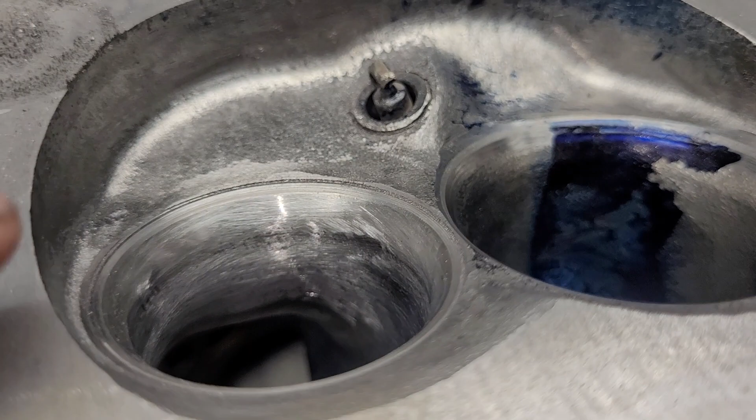You can see we've gotten more around this part of the chamber, right? Because what happens is you put a bigger valve in, this side gets tighter — so it's more and more shrouded. That's going to change the velocity through there.

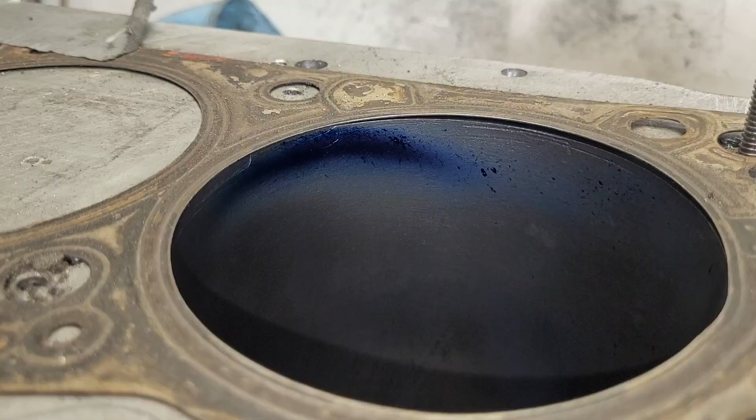And you've got some speckling around the chamber — not great, but not bad. And our bore is a little sparse, but that's okay, it's not done. This really isn't any different than you've seen last time, except it has a bigger valve on it, which did change the angle of our liquid flow a little bit.

So far, the feeling I get on these Chinese Magnums is basically the same feeling I had doing the Chinese Vortec Magnums. I did the New Zealand Vortec before, and it cleaned up really easily, making 275 on the intake and 200 on the exhaust on the first cut — no measuring, no nothing.

I did that for Marvin a while back, and basically I'm seeing the same thing with the New Zealand Magnum versus this Chinese Magnum. This Chinese Magnum takes a lot more work, a lot more grinding, and it's still down 18 CFM.

I do, yeah, we have tight throat ratios, but when I open the throat ratios, I don't think it's going to make that big a difference. We'll probably peak out a touch better. The short side is definitely going to need some work because I picked up 7 CFM by putting a flow ball right on that vane on that roof. So I still have to decide whether I'm taking that vane out. I'd like to see what I can get with it in first. But yeah, the short side is going to need the same kind of work that I did to the regular Magnums.

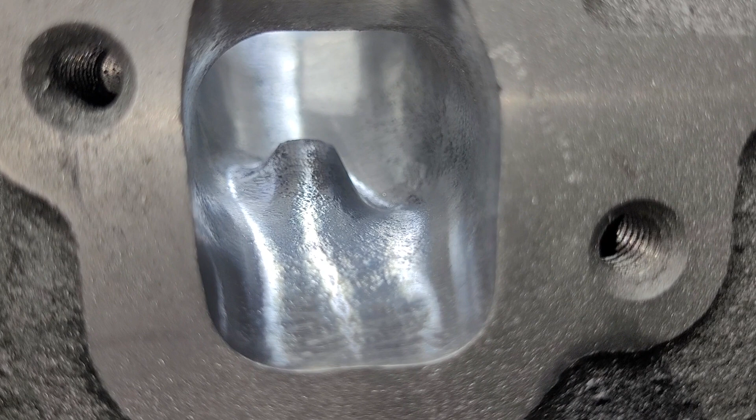The exhaust is exactly the same, but it's flowed with a different valve. So we'll see if that makes any difference whatsoever.

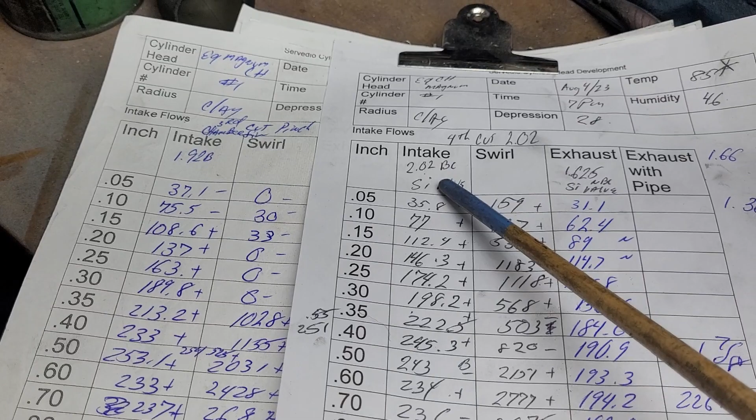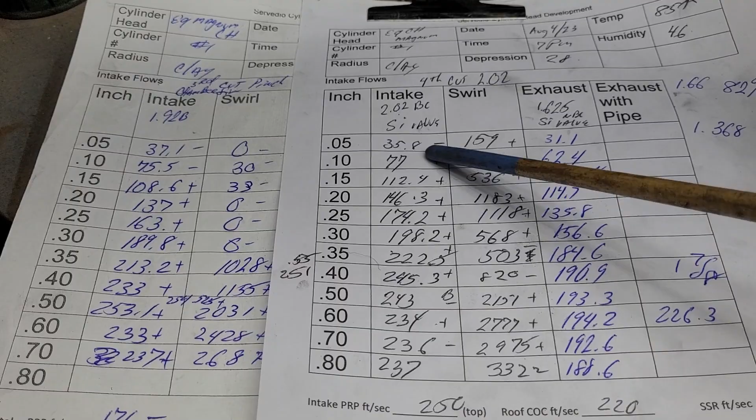Okay guys, third cut. I did some work to it. Still 192. Now what we did is we changed to the bigger valve, and let's see what happens. Basically the same thing that happens usually when I put a bigger valve in, right? We gain more meat—higher flow in the meat of the curve—but it doesn't necessarily top out any better, which is exactly what we got this time, right? We got a minus, we got a plus, plus, plus, plus, plus.

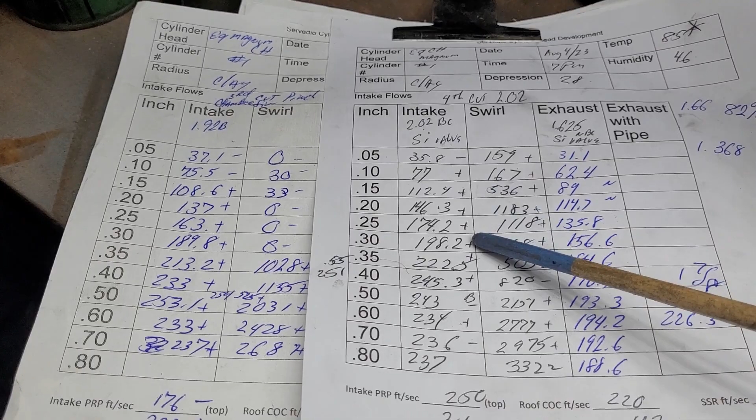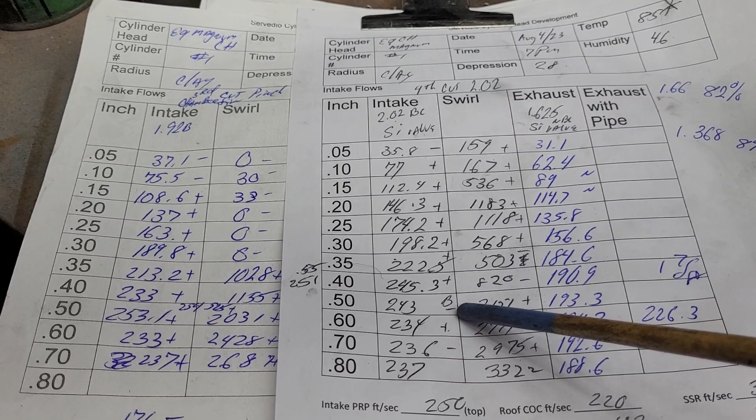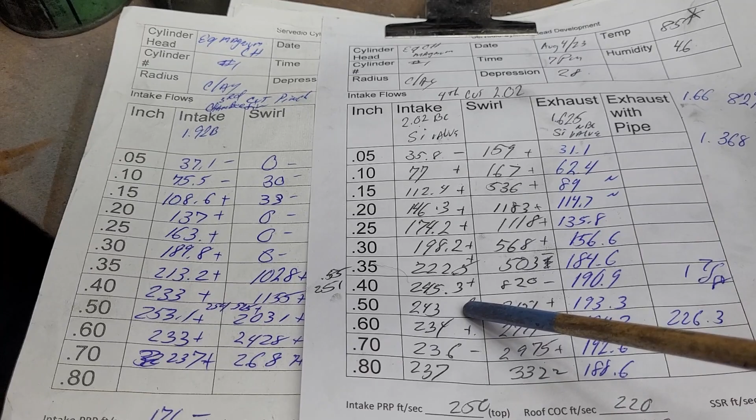And at 500, we already see a B. That's buffering. The short side is attached, and then it's separating, and it's not attached, and it goes back and forth, and your manometer will bounce all over the place, so it's difficult to even get an accurate reading at that point. But in reality, it's already lost it, so it needs work to the short side at that point. That's where I put the flow ball on. You cause turbulence on the short side, helps it to reattach, you get it, and it increases in CFM. You know right then and there what's going on and what you need to do. Okay?

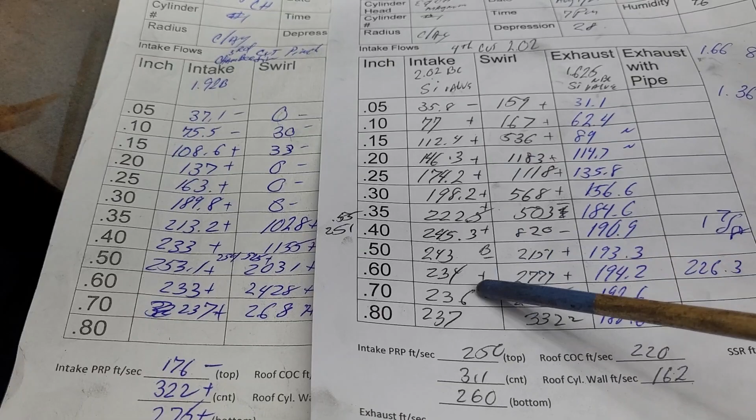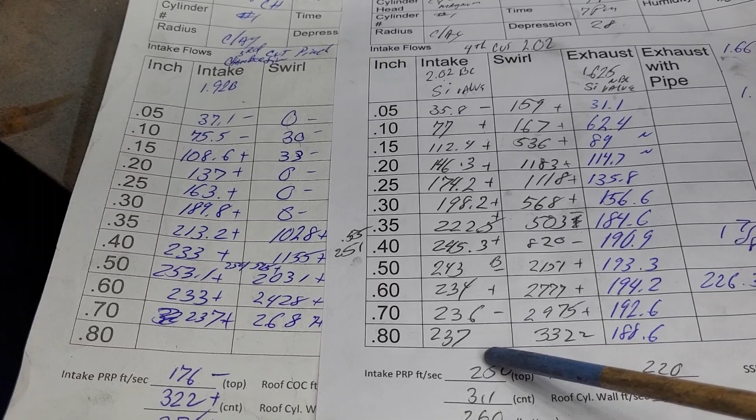And with the different valve, I was able to get up to 800 lift. Okay, I don't have anything to say about that.

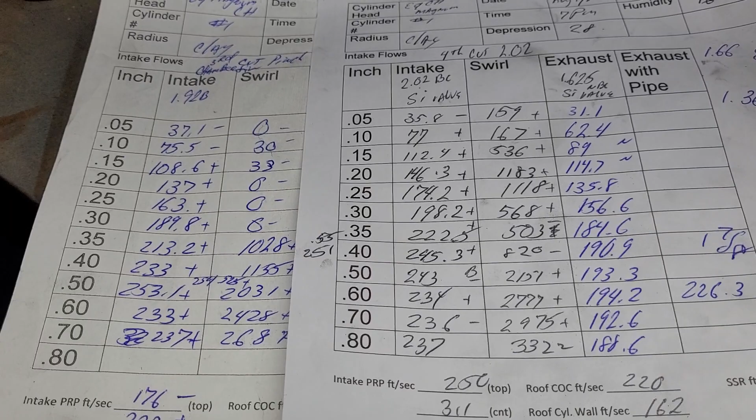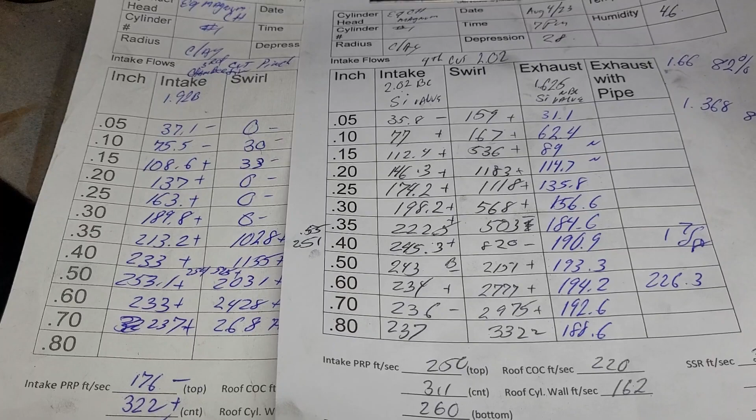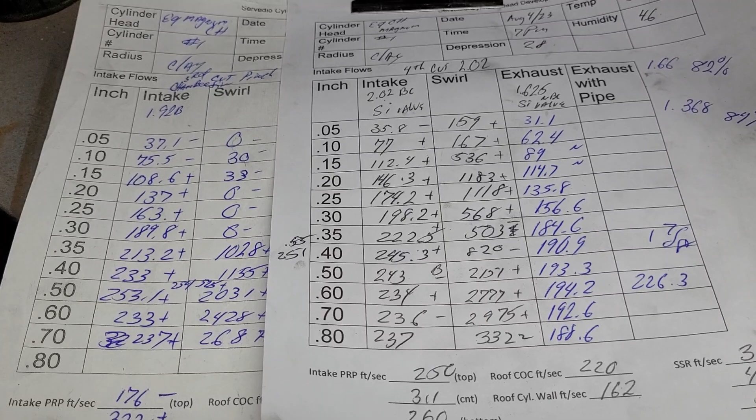Let's go see our swirl. Our swirl actually went up almost all of the curve. I got 2 minuses, okay? Which is counterintuitive as far as I'm thinking. Right? Because the bigger valve is shrouded more, it would be harder to get air on the shrouded part of the chamber, which is really going to increase your swirl numbers. So that I wouldn't have expected that kind of curve. Okay?

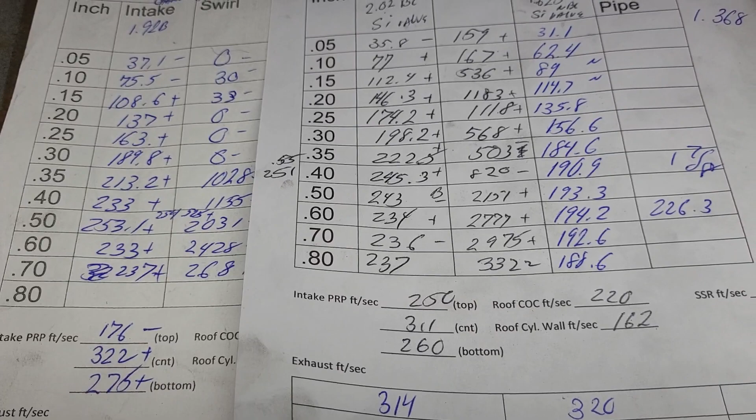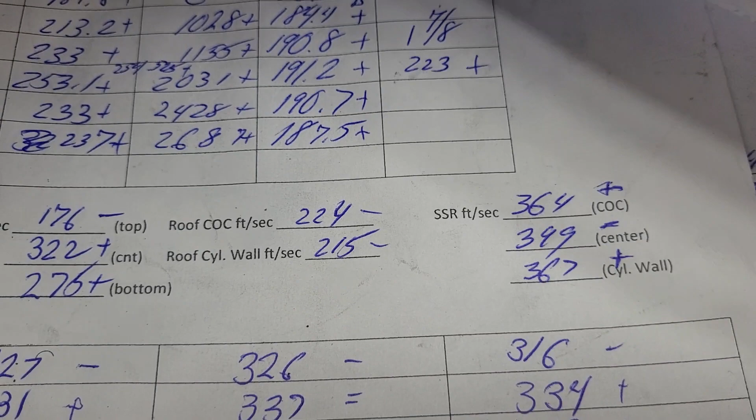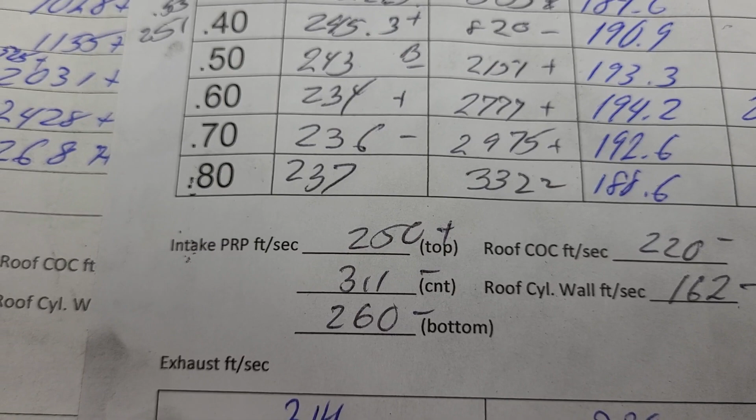Okay, let's do our airspeeds and see, because the bigger valve is going to radically change your airspeeds in the port. So let's take a look at that. Okay, so those are what our airspeeds were, and this is what we've got on your pinch: plus, minus, minus. It is nice and even top to bottom, but as soon as we do some work to the short side radius, that'll radically change, so I wouldn't hold too much validity in that. That's what we had on the roof. The roof was pretty good with the smaller valve, pretty close.

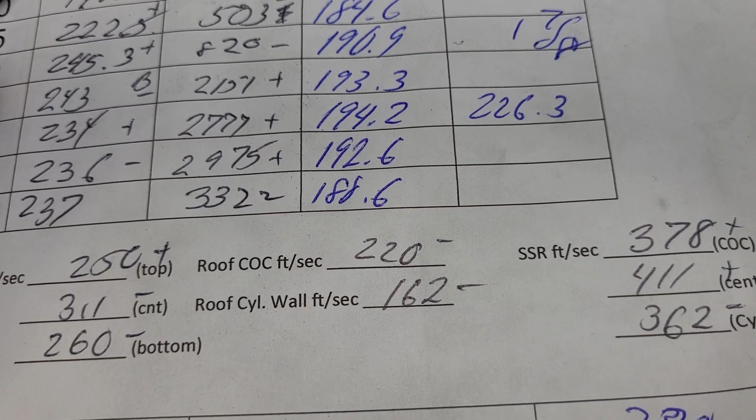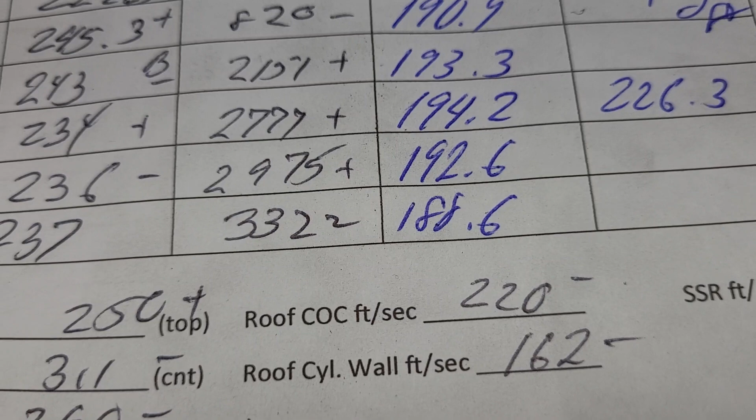Okay, we have a huge discrepancy now. Gee guys, why do you think the airspeeds changed so radically on the roof? I wonder if it has anything to do with the valve being closer to the cylinder wall bore and a little more shrouded. I don't know. You let me know. I think we're on the right path there.

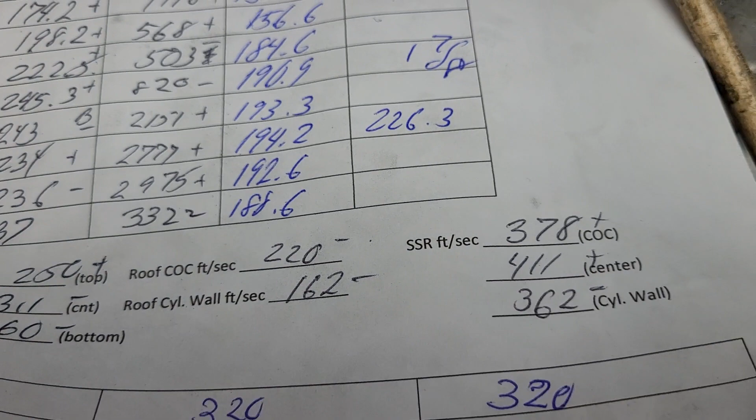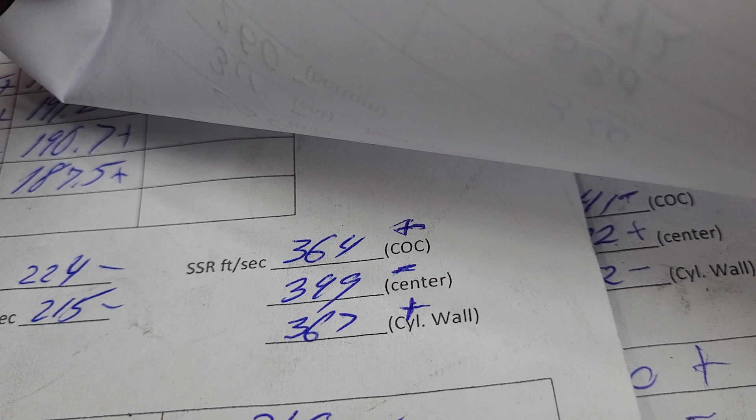And as far as speeds across the short side, that's what we had. This is what we got: 2 pluses and 1 minus. We're not too far from being similar speeds across it, not quite as good as that. That was better, that was better. See, look how close those speeds were. Okay?

And it's interesting where it's fast, right? Okay, let's move on to the exhaust.

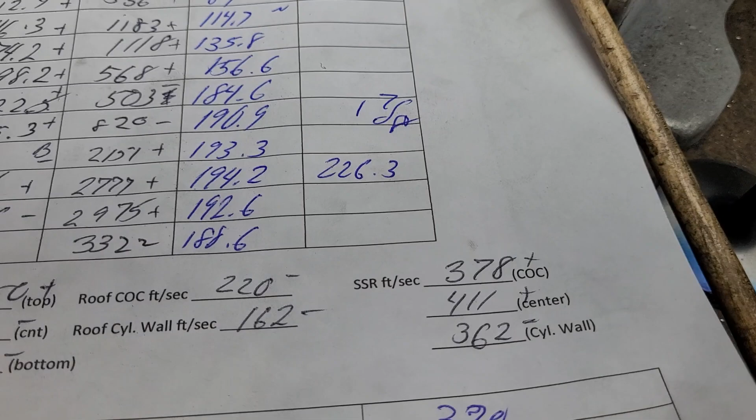As far as the exhaust valve shape, you can notice a couple things. The stock Magnum is tuliped, and the SI is more of a flat design. Instead of the tulip being straight, it's balanced, with more of a curve to it. That's going to make a difference in how it flows, and it's also been necked down a bit. The Magnum has a thicker stem where two pieces have been welded together, but this SI valve is one piece, so it doesn't have that weld.

So you would think the SI would flow circles around the stocker. Let's take a look.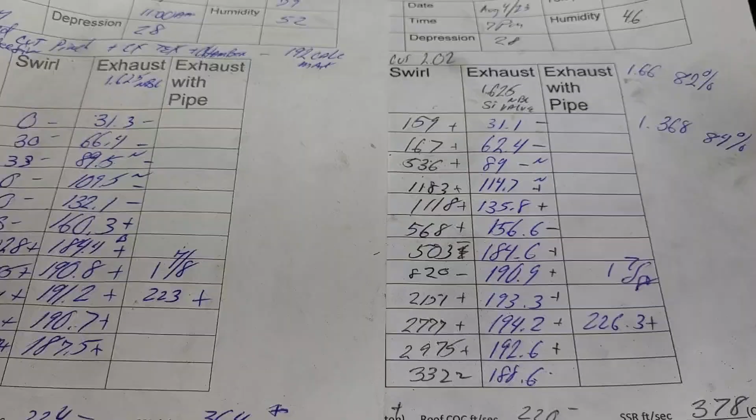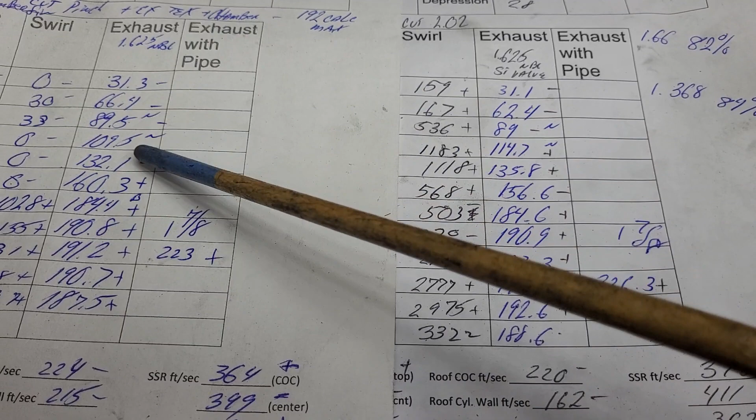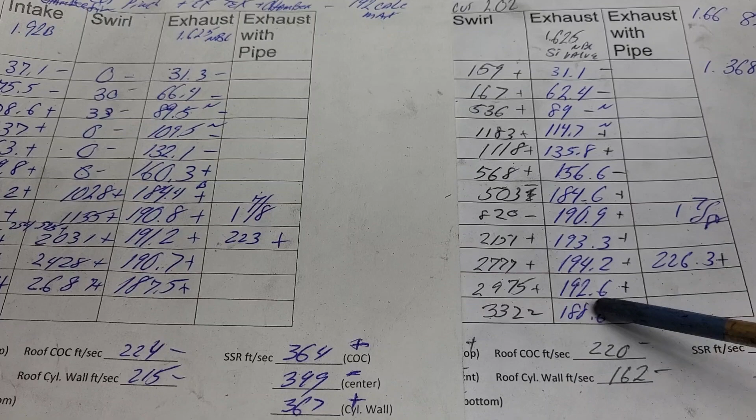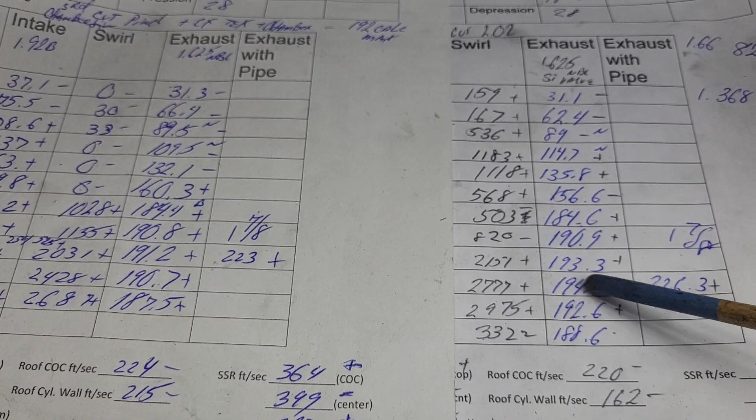Third cut stocker, same port, SI valve. How'd we do? We got a minus, minus, minus - we got noise across the board. Then we started to gain though, here: plus, plus, minus, plus, plus, plus. But the pluses aren't big - it's not that big a difference. I think the biggest difference is we got 114 here, we got 109.5. The losses aren't big either, relatively small, so it didn't change much.

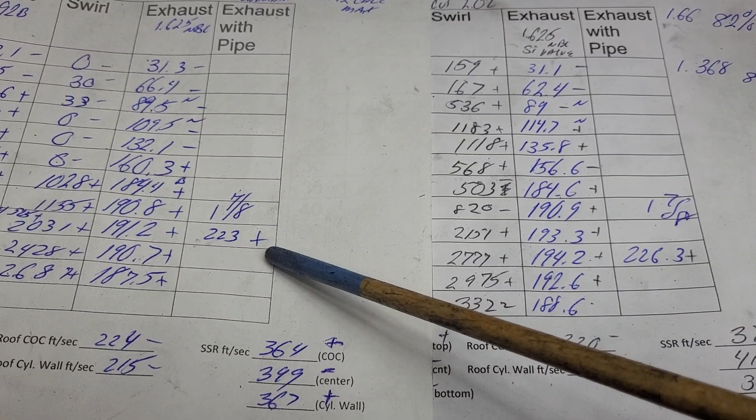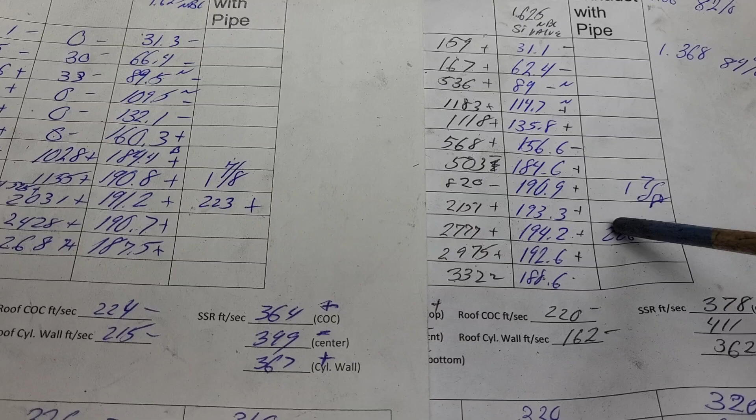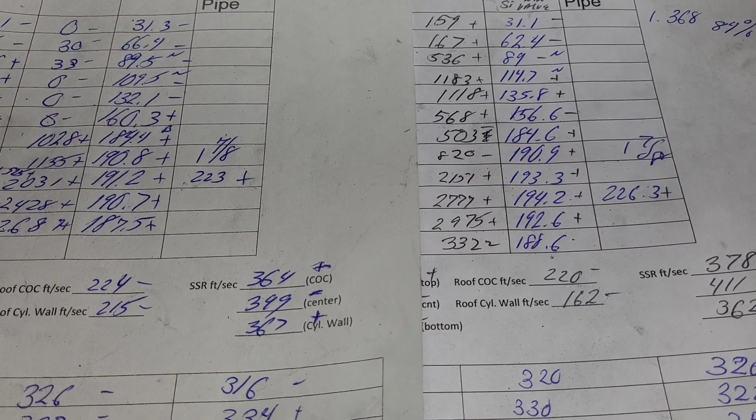We topped out at 223 with an 1 7/8 pipe, and we topped out at 226.3 with an 1 7/8 pipe. In reality, the exhaust is way good compared to the intake. So I think the only thing I'm going to do to the exhaust is open up the throat a touch and retest that. I'm going to open up the throat on the intake too and test that. So next test will be changing the throat ratio and seeing what happens.

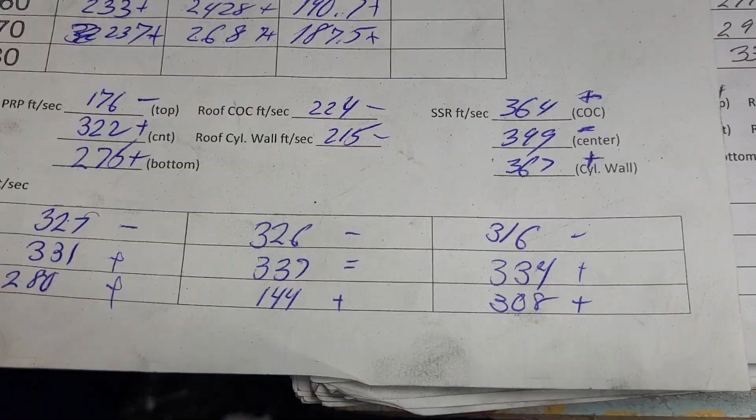But let's take a look at our air speeds. This is where we were. Let me pause you. Okay, so these are our numbers with the Magnum valve. These are our numbers with the SI valve.

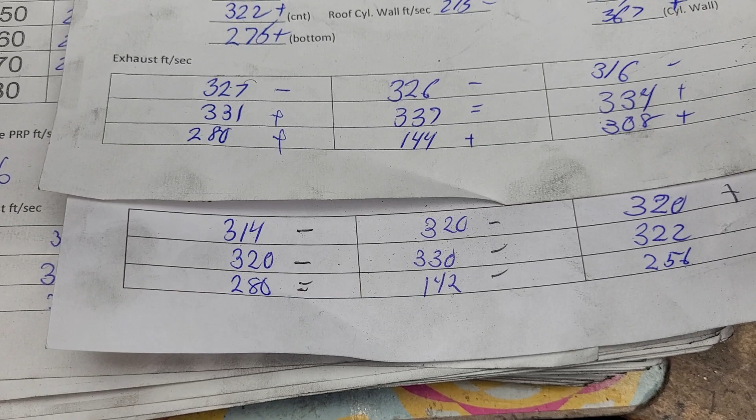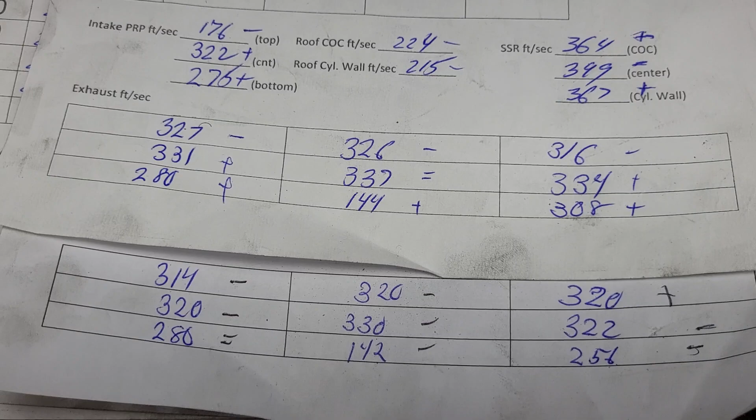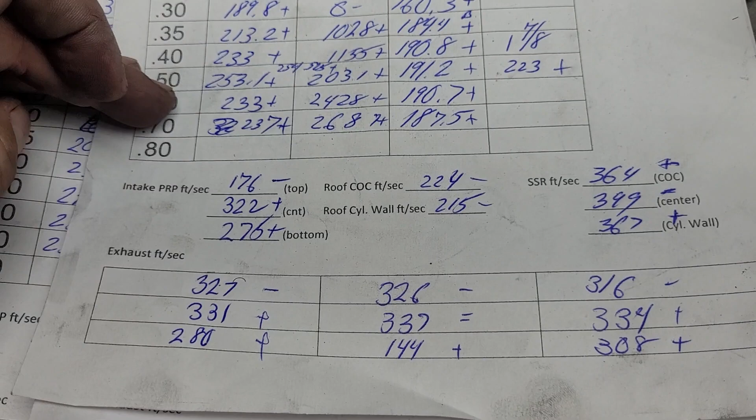It's very interesting because they're both done at 0.6 inch lift. The SI valve doesn't look nearly as good according to the pluses and minuses. But at 0.6, we're at 190.7 here, we're at 194.2 - a couple CFM difference. But according to the air speeds, the port is happier with the Magnum valve, right? Interesting, interesting, interesting, guys. We're good as far as across the port. Not bad. This was better.

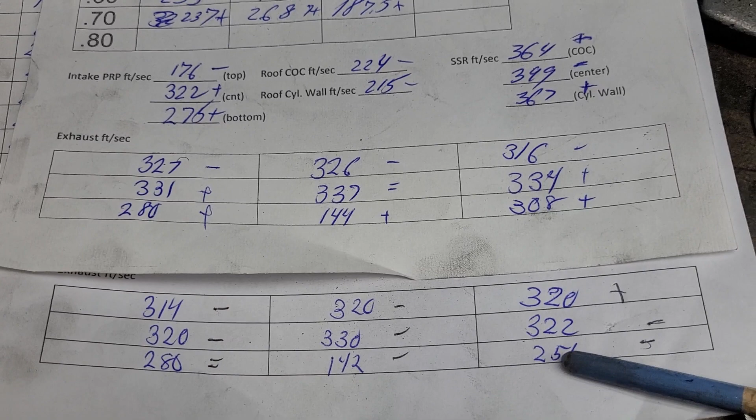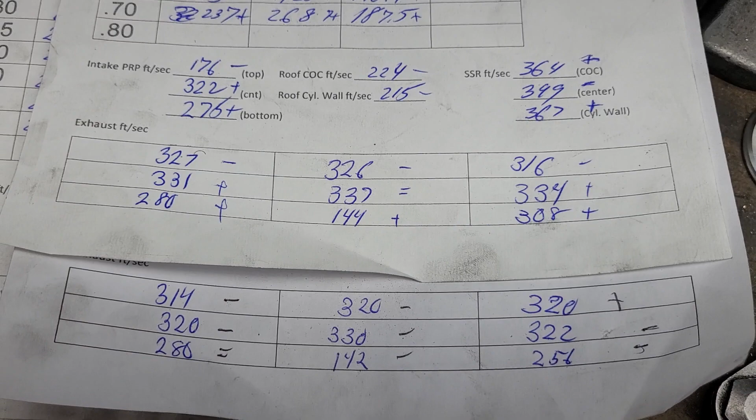So we're going to change the throat ratio and then recalculate and see what we got to do at that point. Remember, there's tons of metal on that exhaust port, but it's already too good for the intake port as far as I'm concerned. I mean, we're topping out... I don't even know if I went over this, it's so whacked out.

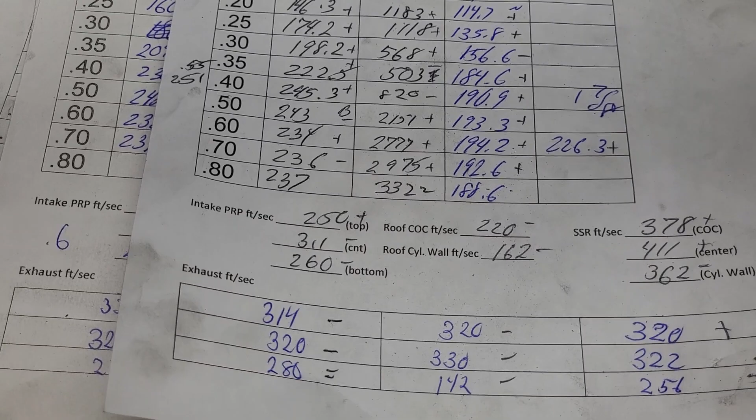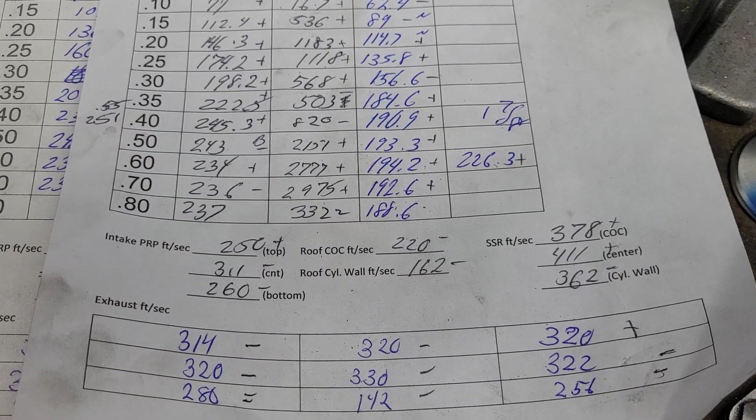At 300, we were at 198, which was a step in the right direction - it went up. But we only topped out at 251, not nearly what we need to do. This customer is going to send me a 340 Victor Jr., I think, so that will certainly help, because if you take a port that's already hurting and put it on a dual plane, it's really going to get knocked back. But it'll be an interesting comparison.

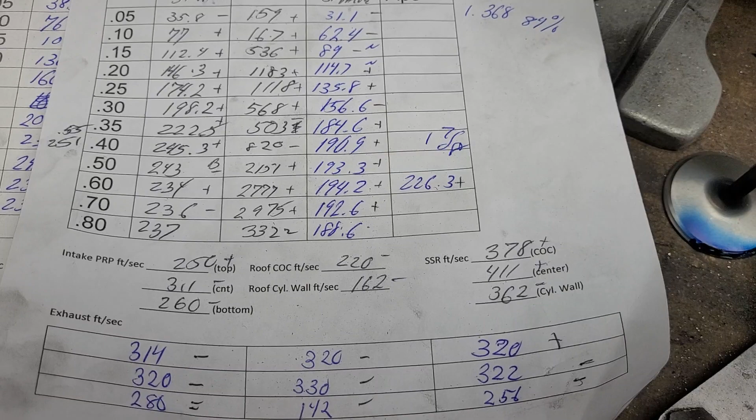I got the valves in for the New Zealand Magnums and the Chinese Magnums at the same time. I have to do the whole valve job on the Chinese Magnum head, which is no small thing with those hardened seats - they're ridiculous. Then I can start on the New Zealands, putting those bigger valves in. I think those are already good, they're flowing like 267 on the intake. Those are going to pick up really, really well. And then we're going to choke it with the Performer RPM manifold. It'll be interesting to see once we improve the cylinder head flow how much the manifold picks back up.